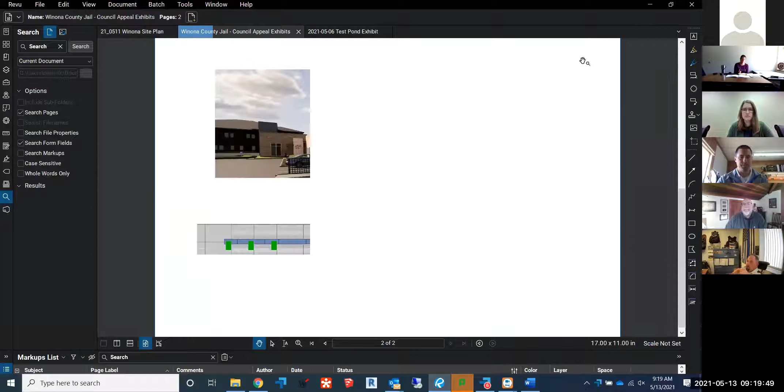So I'm going to share with you where we're at with the design renderings here. Okay, so what you're seeing here is an exhibit we will be issuing with the appeal. The green is representing what we had when we went in to ask for the variance. You can see that transparency, or glazing, of this facade was at 2%.

And what we've modified since then is what you see in blue. What we're looking to do is ask for, instead of the 40% that was asked for, go down to the 20%. And then we're providing a rendering to show what that does look like.

And we talked about in the variance that on this north side, due to the fact that a majority of these spaces will be requiring security bars to comply with the Department of Corrections secure barriers, the plan is for these to be aluminum storefront frames, and then provide bars behind them, with the exception of the vehicle sally port, which is technically outside of the secure perimeter, so that won't need bars within that space.

But what we can do is meet with the user group and discuss which of these glazing pieces will be clear versus translucent or opaque. And the city has accepted the fact that some of these will need to be opaque. For example, the work release locker room where inmates are changing - of course we can't have clear glazing, so they acknowledge that and are accepting that particular piece of glass will be opaque. We call it spandrel glazing.

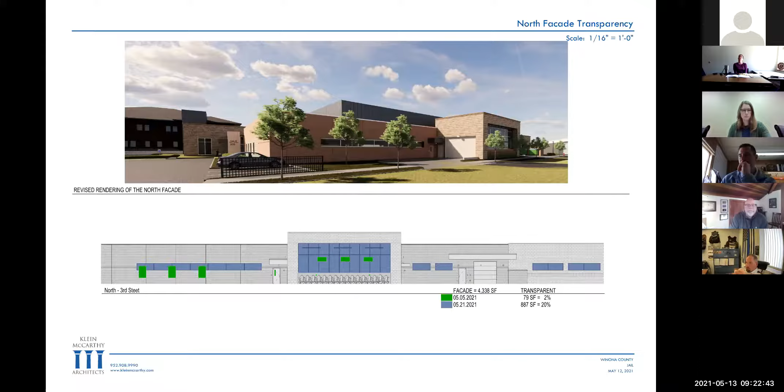And looking on the south side, the function of this part of the building is technically not within the secure perimeter, so we won't be required to have security bars in this area. But it is a back-of-house function, so again, we'll talk through which portion of these glazing pieces will be opaque versus transparent in that glazing piece with the user group.

But in this case, we were able to meet the 40%, so we wouldn't be asking for an appeal on this side. We're just providing it to show compliance with the 40%. Any questions on this one?

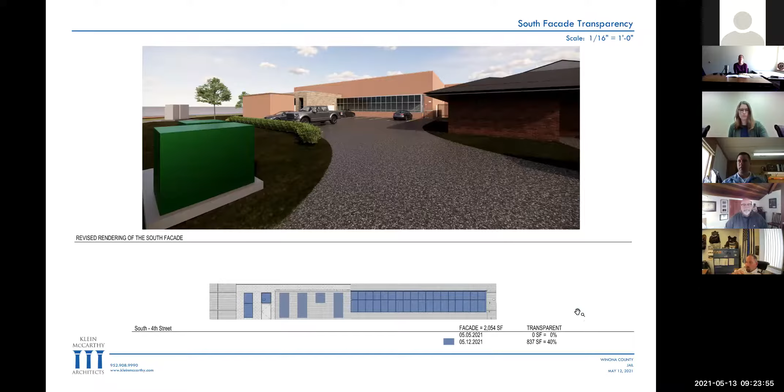Next topic is looking at the site plan. We have been coordinating with the mechanical, electrical, and civil engineering team to review how the utilities will be entering this building, and talking about where all the mechanical and electrical equipment will sit within the mechanical and electrical room.

The only change we actually have from the last time we met with you was the south side of the building and where the emergency generator sits. Previously, we were looking at it located south of the parking lot, and in reviewing how all the equipment lands, we've been able to modify the extent of the building to clean up and reduce the amount of corners along the south side, and then locate the emergency generator closer to the building and closer to the electrical room, and provide a little more green space along 4th Street here.

Any questions on that?

Have we identified, is this generator going to solely take care of the jail, and then the existing LEC building will be serviced by its current generator? Is that how that's going to fit together? Yep, we're going to keep them separate.

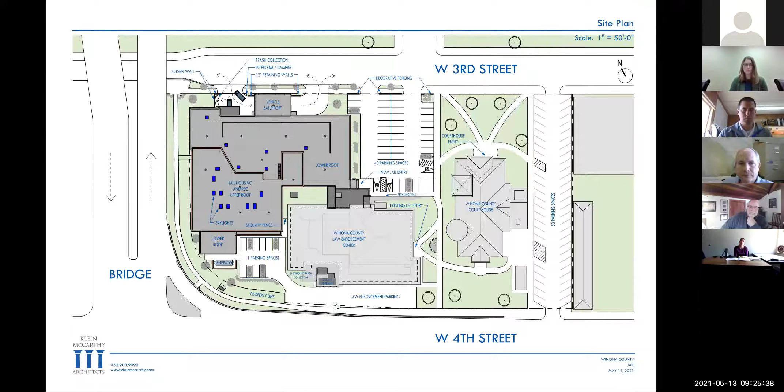All right, so next topic, construction phasing. I don't have any graphics to share on this one, but a couple of topics we want to get into is discussing construction phasing and how the impact of the renovations will be for the dispatch area.

I don't know, Steve, do you want to maybe jump in, or maybe Tyler? I know you guys have had discussions more specific on how you're proposing to start and what kind of impacts that might be on schedule or occupants within the space.

This is Steve. After the conversation with Tyler, I don't think it will have much of an impact on the schedule as far as construction or anything to do with the jail. If anything, we're trying to figure out a way to streamline things. It would have a potential impact more on the operations of the current facility, management-wise.

But it's going to happen one way or the other, so we were looking at the totality of everything. The construction start of the new facility should be synonymous with what's going to be running it, which is dispatch. So the concept of waiting a little bit to get dispatch up and running...

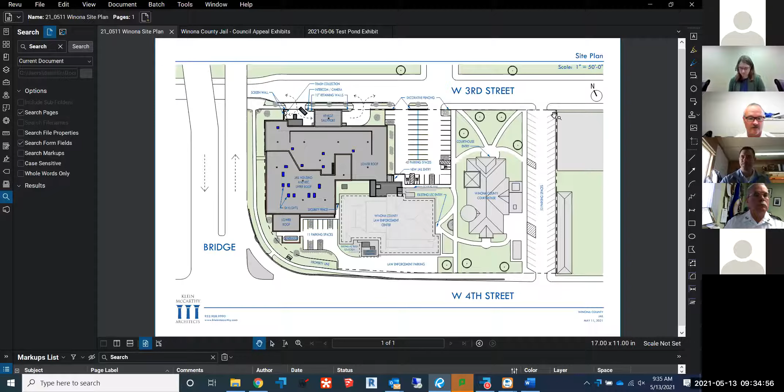Has there been any discussions about the existing utilities and when they're going to be moved? I know the last time we talked was a while ago. Is that on the agenda to talk about? It's not on the agenda, but I haven't heard any updates from Xcel. What I can do is circle back and review that schedule, just to ensure that's in the right timeline.

Dave, has anybody contacted you? No follow-up discussions, and I would think we'd want to get that moved sooner rather than later. There's no reason to delay, just get it out of the way. Well, they've got to put that line in under the parking lot over at the courthouse to eliminate the overhead line. That work will take them a bit to design and install, and that needs to take place.

Danielle, do you have some contacts there? Do you want to follow up, or should we? What's the best way to move that forward? I can certainly follow up. I know it was Christopher we were working with at Xcel, but I can circle back. I'll copy you on it, Dave. He's no longer with them, he now works for Rochester Public Utilities.

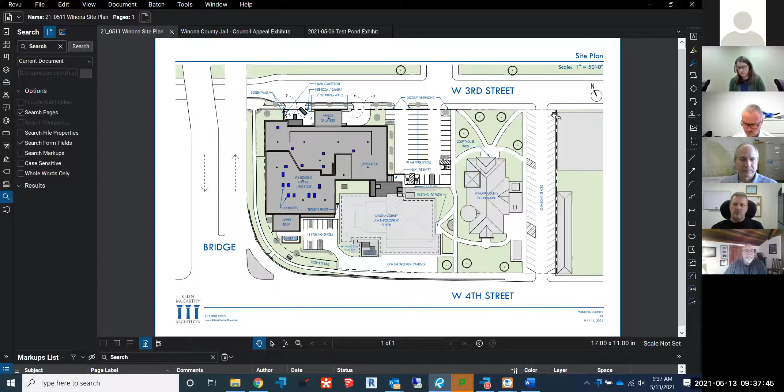Getting back to the agenda, on FF&E, Steve, I don't know if you need to share your screen, or if this is just a topic of discussion. I don't have anything specifically to share, but I think we just need to make sure we're all on the same page about what I'll call owner things, not the permanent furniture, fixtures and equipment—sticking with removable things and having options to change rooms or locations easily, whether intended from day one to six months or six years later.

You guys completed a pretty extensive, detailed list with all the costs outlined that was plugged into the estimate Market and Johnson previously presented. So you don't see any changes from what you put together for SD? I don't. I know there could always be some minor ones, but the whole idea was to leave a lot of options for us in the future. That's why we wanted to do it that way.